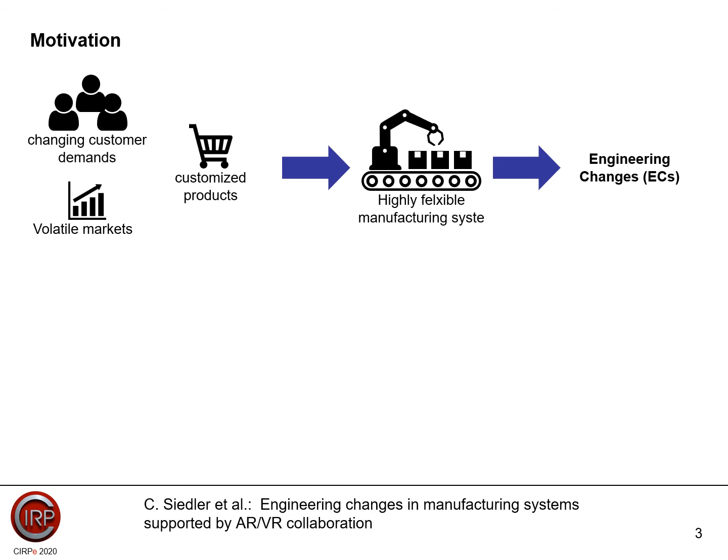Due to rapidly changing customer demands, volatile markets, and customized products, manufacturing systems need to be highly adaptable, and this leads to frequent engineering changes. However, the planning and implementation of these engineering changes are often time-consuming and prone to errors. The implementation of these engineering changes also leads to planning errors, which are usually detected too late, and this results again in long downtimes and costs.

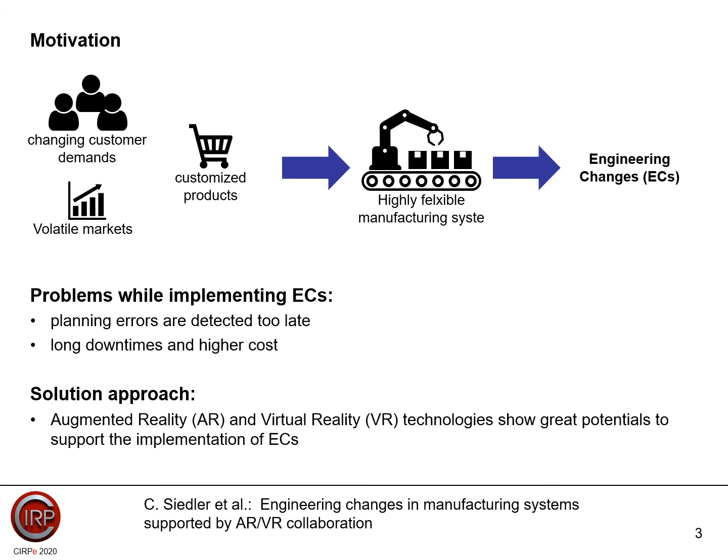These risks, together with the often complex evaluation and the short time span that is usually available in industrial practice, lead to the following approach. Our approach is to use augmented reality and virtual reality technologies as they show great potential. The objective of this paper is to identify the specific capabilities and characteristics of augmented and virtual reality and then assign them to the single steps of the engineering change process.

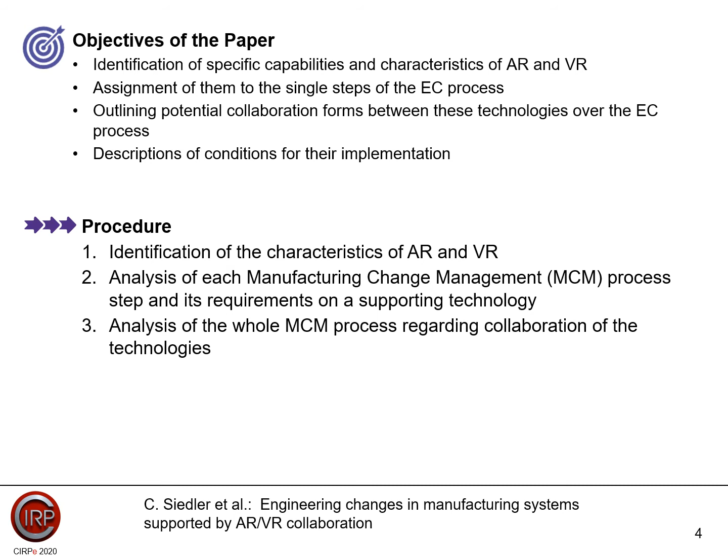Furthermore, the potential collaboration forms between these technologies over the whole engineering change process are outlined and the conditions for the implementation are described. So in the first step, the characteristics of augmented and virtual reality are identified, and in the second step, each step of the manufacturing change management process is analyzed and the requirements on a supporting technology are identified. In the last step, the manufacturing change management process is analyzed regarding the collaboration of the technologies.

Looking at the state of the art, engineering changes in a manufacturing system can be seen as an alteration made to the factory or its elements that have been released for or are already in operation. There are three possible engineering changes. First, the engineering changes represent the reconfiguration of machines and workstations. Second, machines and workstations are added, substituted, or removed. And thirdly, there can be a change in the network of relationships between machines and workplaces.

All engineering changes are managed by the manufacturing change management, and the corresponding process consists of three main steps: initialization, implementation, and a follow-up phase. The initialization phase is the starting point for handling all engineering changes in manufacturing, and it ensures a targeted initiation. This phase consists of three process steps. First, the recognition of the need for a change. Second, the analysis of a change requirement. And third, the formulation of the change itself.

The second phase in the process aims at a systematic implementation of the planned engineering changes, and they are implemented within the framework of a change project. The implementation phase also consists of three steps. In the first step, it is about the planning of the change process. In the second, the definition of a change project is done. And in the third, the implementation of the changes happens.

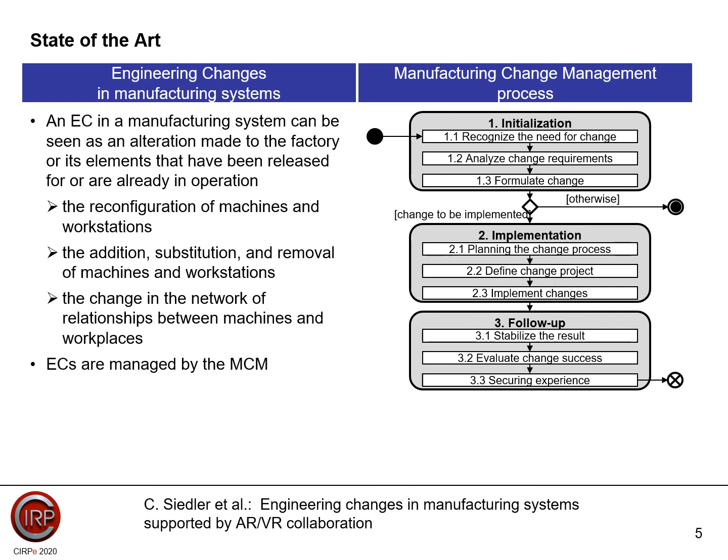In the final phase, there's a focus on the systematic completion of the change and the standardized documentation of the knowledge which is gained in the change project. This knowledge base helps to use synergies and prevent a repetition of previous errors, and additionally, it accelerates future change processes. This follow-up phase also consists of three steps. First, the stabilization of the results. Second, the evaluation of the success of the change, and third, the securing of experiences.

The extension of the real environment with virtual objects is called augmented reality. It refers to the overlapping of reality with computer-generated virtual information. The objective of AR is to enhance the user's perception of the real world and to enable interactions with virtual objects in the realms of the physical world. These virtual objects may contain further information that is helpful for the user, for example, to complete a certain real-world task. Therefore, AR can be used as a tool to simplify real-world tasks performed by humans.

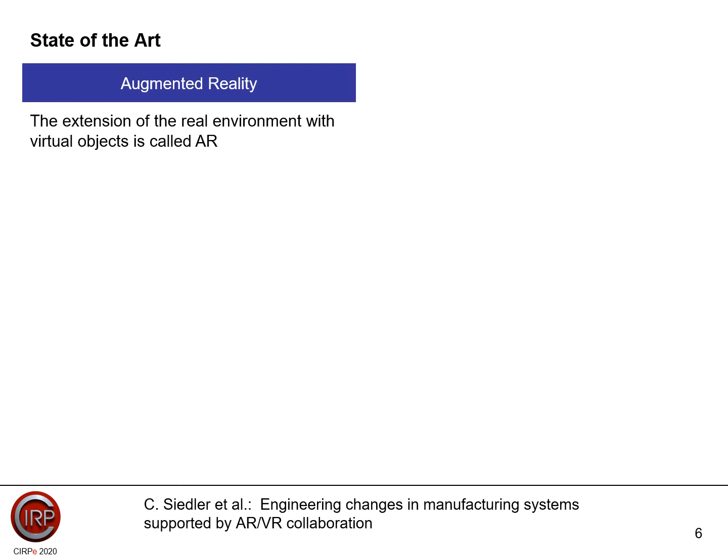Virtual reality is defined as a computer technology for creating and displaying virtual environments. It consists of computer-generated three-dimensional objects and their temporal dynamics. The objectives of VR are the simulation of human sensory systems, the interfacing of the real world and the virtual environment, the creation of the VR content, and the collaboration of multiple participants with the help of VR.

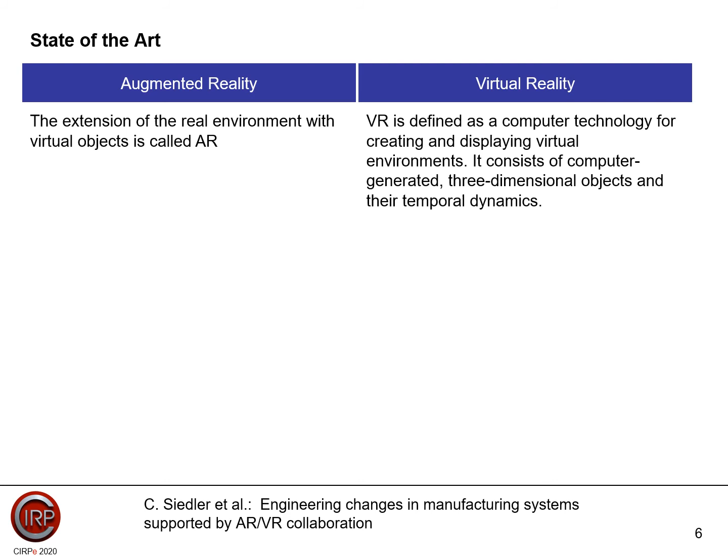The characteristics of both AR and VR are collaboration, immersion, annotation, and interaction. So if we're looking at collaboration, for example, AR is used for the collaboration of the real and the virtual world. Therefore, it can be used, for example, for overlaying the future engineering changes on the current manufacturing system to visualize the changes. Virtual reality can be used for the interactions with multiple participants as well as the collaboration within the virtual world itself. So it seems suitable for e.g. planning, simulating, and evaluating possible engineering changes before realizing them.

If we're looking at the second characteristic, immersion, AR and VR both create the impression of being physically present in a non or only partly physical world. This makes it easier to understand the changes, the corresponding requirements, the realization process, as well as the consequences of an engineering change in a manufacturing system.

Looking at the characteristic annotation, the objects of interest can be highlighted virtually and annotations can be attached to them in order to support subsequent planning steps. For augmented reality, the information can be directly connected to the machines and the real manufacturing system. This allows to create a knowledge base based on real conditions. Within virtual reality, the annotations can be added as well, but they are based on the underlying 3D model as well as an experience of the users.

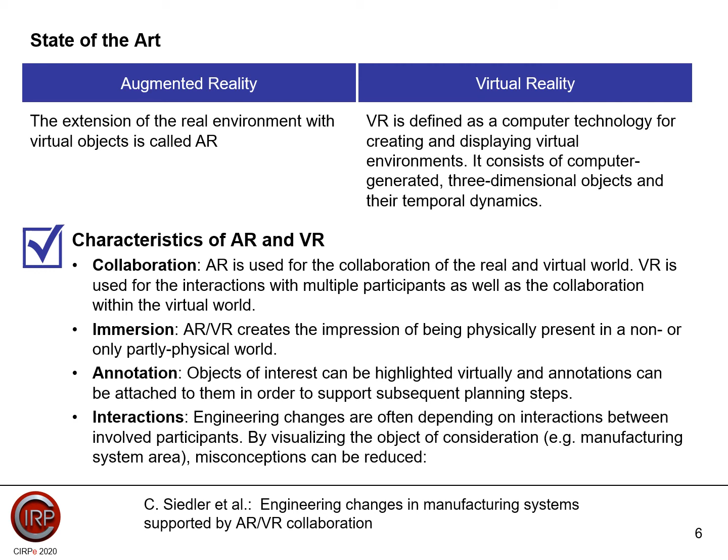Looking at the fourth characteristic, interactions, the engineering changes are often depending on interactions between involved participants. By visualizing the object of consideration, for example, a certain manufacturing system area, misconceptions can be reduced. With augmented reality, interactions might be more complicated as it requires more investment to connect, for example, several smart glasses to share one view. The interactions with the help of virtual reality are much easier, as for example, a CAVE is created for the interaction, especially for multiple users.

So if we're now looking at the characteristics which are explained before of AR and VR, VR seems more suitable as supporting technology as it fulfills all needed requirements. Still, both technologies promise strengths and weaknesses in different steps of the manufacturing change management process. Virtual reality, for example, is more likely to be suitable in the planning phases. In contrast, augmented reality seems applicable in the implementation and follow-up phase, as these phases require a direct comparison of the initial and the target state.

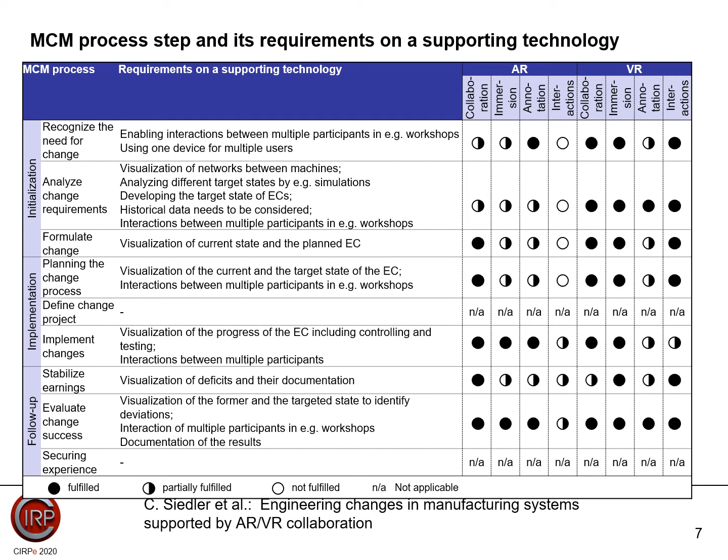In the next step, the collaboration of the technologies in a manufacturing change management process is analyzed. Based on the previous analysis, which was shown in the slide before, AR and VR technologies can be used in parallel in some of the manufacturing change management steps, and they fulfill the requirements in different degrees. So, if the requirements of a step are partially or fully fulfilled, a collaboration of the technologies seems suitable. So, we're having a closer look, and we found 4 steps in a manufacturing change management process which seem to be suitable for collaboration.

Firstly, we found a step in the initialization phase, and it's called Analyze Change Requirements. Here, the networks between machines have to be identified, and based on this, the target state has to be developed. Augmented reality is here able to support the visualization of these networks directly within the manufacturing system, for example, by visualizing the material flow. In contrast, virtual reality is more suitable for planning the target state. A collaboration of both enables the combination of the network information and the planned target state of the engineering change.

Secondly, during the planning of the change process, the initial state and the target state need to be visualized. Augmented reality is able to provide information directly again in the manufacturing system, such as infrastructure, material flow, and this is usually not shown on factory plans. So for planning the target state, virtual reality seems to be more suitable, as it is based on existing data and information, and it is more convenient to use for the planning task.

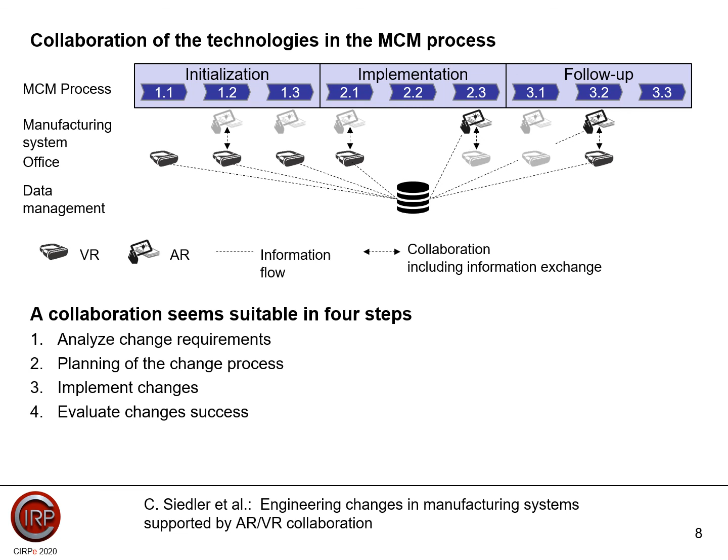So looking at the evaluation of the change success, AR and VR can be used to detect deviations between the initial and the target state. Augmented reality offers the capability to record the manufacturing system and to transfer this information to the virtual reality model, where the deviations can be detected by superimposing models.

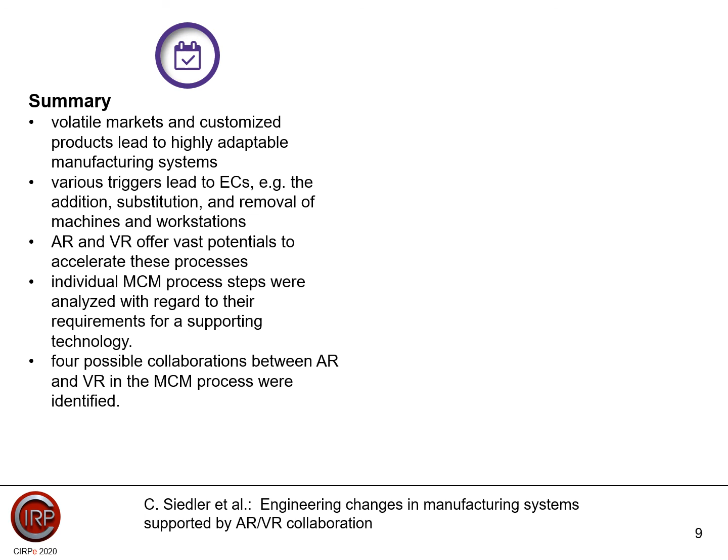To summarize, due to volatile markets and customized products, manufacturing systems need to be highly adaptable. During operations, various triggers lead to engineering changes, for example, the addition, substitution, and removal of machines and workstations. Augmented reality and virtual reality offer vast potentials to accelerate these processes. Therefore, we analyzed the individual manufacturing change management process steps with regard to their requirements for supporting technology. We compared these requirements to the objectives and capabilities of AR and VR. And furthermore, we identified 4 possible collaborations between AR and VR in the manufacturing change management process.

In the future, an encompassing AR/VR approach is needed to support the engineering changes in manufacturing. This also requires linking all the individual steps to a central database that stores the historical data and also new information. Additionally, different roles of users of the manufacturing change management processes will have different views on this kind of shared information database. This single source of truth provides all the relevant information that is the foundation for all AR/VR applications for a specific change. This also leads to fewer errors during the planning of the change process and to a simplification and acceleration of the process execution.

So, furthermore, the modes of support and collaboration need to be investigated too, and this in detail by a systematic, in-depth approach. It also evaluates their suitability. Usability will be another important factor. The aim is to fulfill efficiency, safety, and satisfaction requirements for different users and roles, among other things.